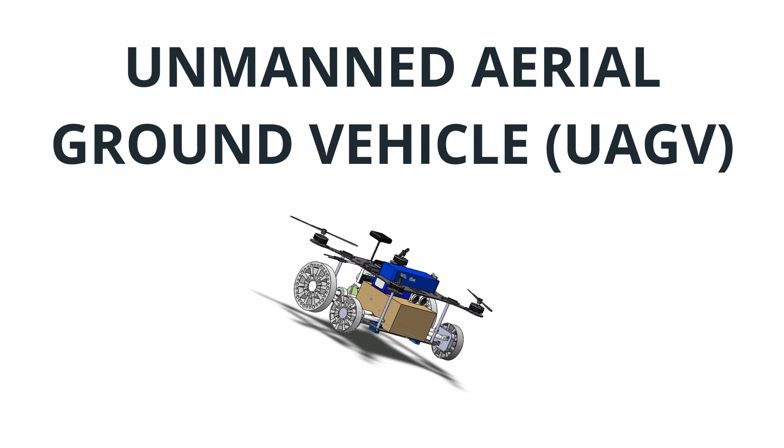Hello, this is Team 12, and today we are presenting the Unmanned Aerial Ground Vehicle, a remote-controlled flying and driving robot. The UAGV was created to aid visual mapping and search and rescue missions that happen beyond visual line of sight.

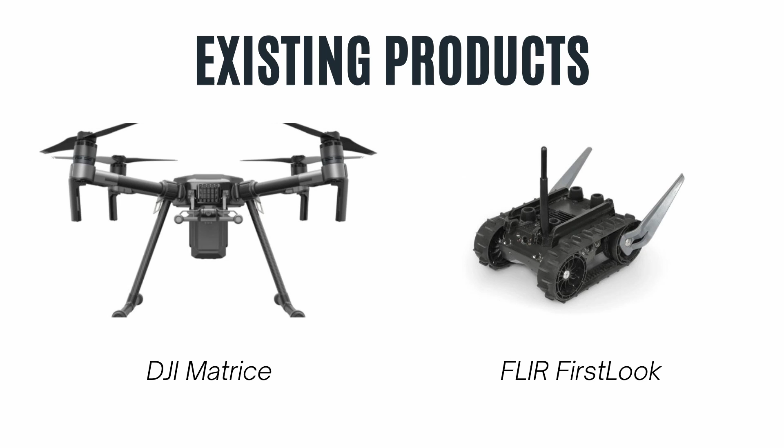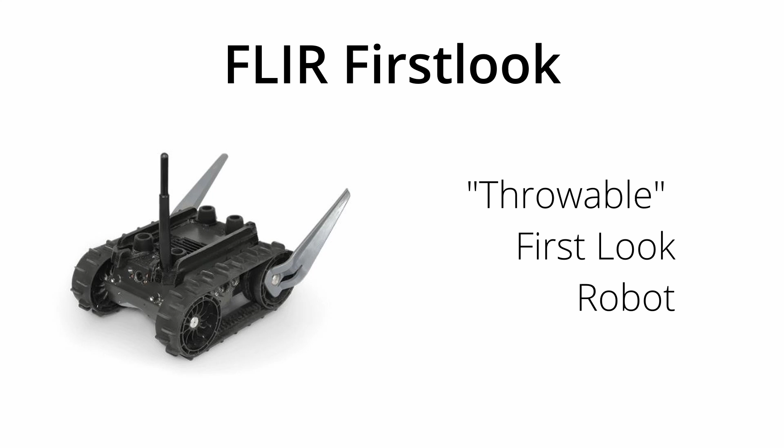Some existing products used for visual mapping and hazard detection are the DJI Matrice line of industrial application drones and the FLIR Unmanned Ground Vehicle. A popular drone from this line is the 200 series, which has a large lifting capacity and a maximum flight time of 13 minutes with a 2.4 kilogram payload. The FLIR First Look vehicle, on the other hand, is marketed as a rugged, throwable robot intended for surveying hazardous situations. While these vehicles seem promising, both lack the full maneuverability of having both flying and driving capabilities, which might be necessary for these applications.

For example, in order to scout a location, the First Look is intended to be thrown through an opening and remote controlled, but has no way of maneuvering across obstacles it encounters. The large frame of the DJI drone limits the visual surveying to a broader scope, as the flying maneuverability in and around obstacles such as buildings is very difficult.

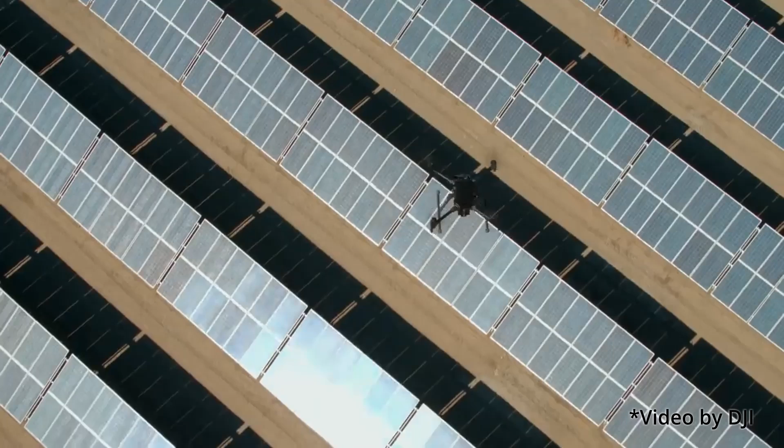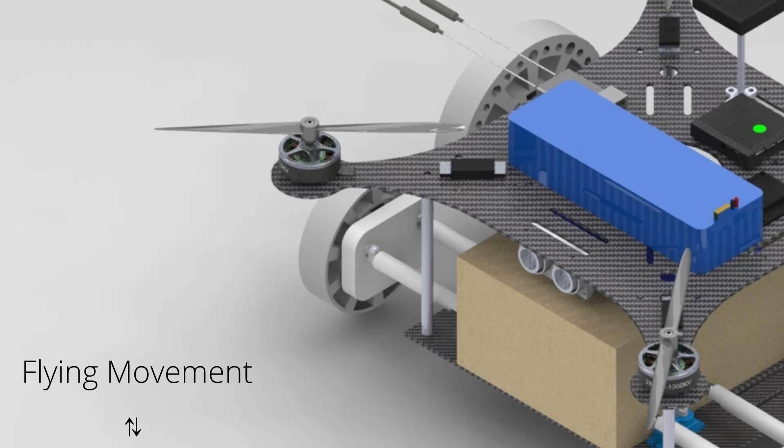The only vehicle found to fly and drive available on the market was a ground-air drone toy, with a maximum flight time of 8 to 12 minutes in flying mode and no additional payload. The goal of the UAGV was to create a highly maneuverable vehicle that can switch between ground and flying modes when one or the other is preferable due to terrain or weather conditions. The applications are not limited to this scope, with a swappable payload of up to 300 grams that can carry an emergency relief package or special thermal imaging camera, to name a few examples.

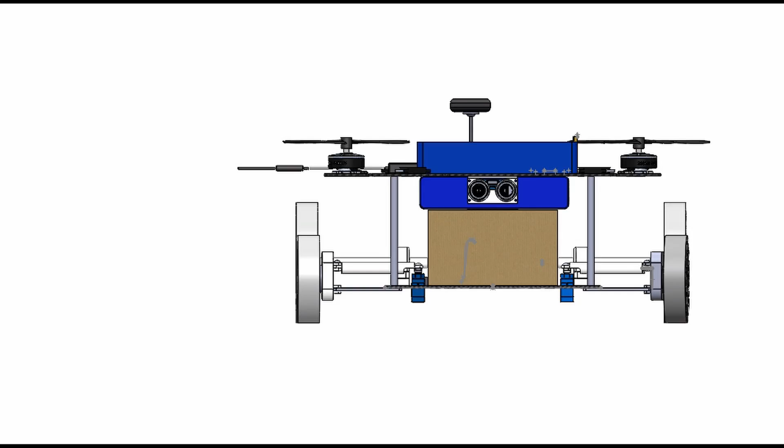Let's take a deeper look at the different functional systems that make up the UAGV. The mechanical systems consist of a steering assembly, rear-wheel drive gearbox, suspension system, payload distribution, and chassis.

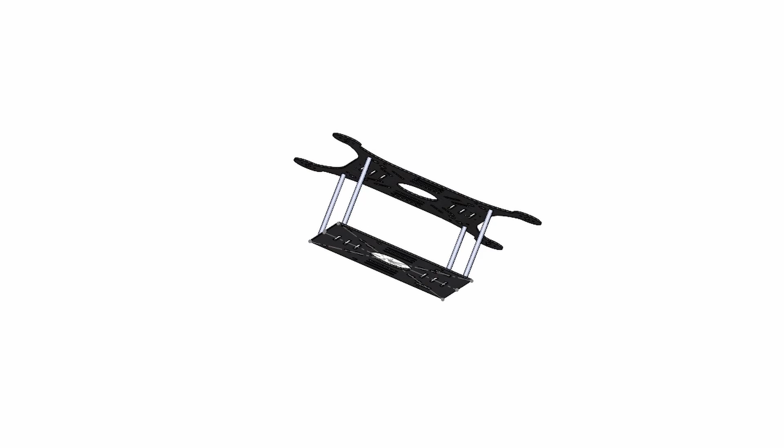Let's start by looking at the chassis design. We decided on dividing the chassis into two separate levels. The bottom level can accommodate a payload box that contains crucial supplies such as food, water, and first aid for search and rescue operations. It also houses ground systems, such as steering and drive motors. The upper level is an isolated section, meant for sensitive and critical electronic components.

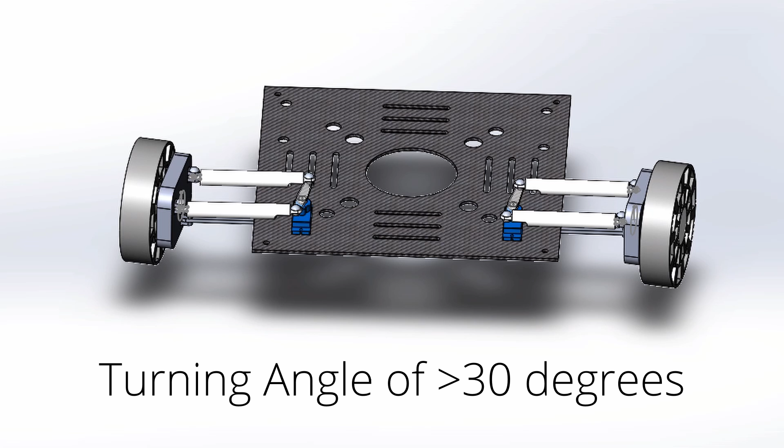Now onto the steering. The steering system is an independent two-servo tie rod design that takes up the least amount of space while also ensuring a turning angle of at least 30 degrees. The steering system consists of three supporting bars: the top two are the tie rods, responsible for turning the wheel, while the third bar is the load-supporting control arm. The rods are integrated into the wheel hub, which isolates the wheel's rotational motion from the linear contraction of the tie rods.

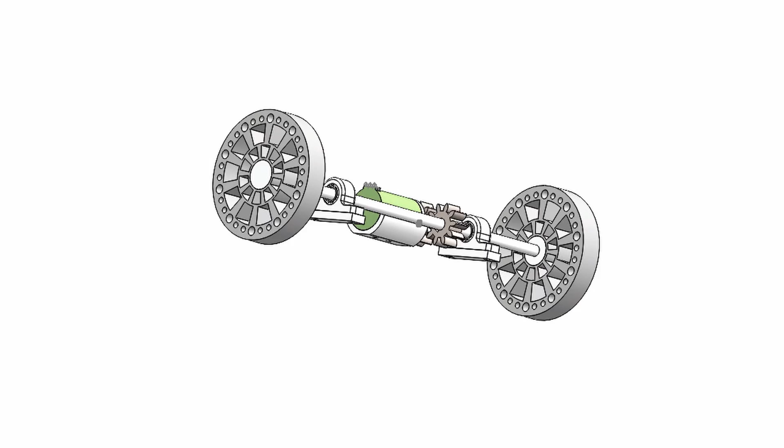Moving on to driving, the UAGV uses rear-wheel drive to propel itself while on the ground. It features a simple power transmission design that uses two gears to transmit power from the motor to the axle.

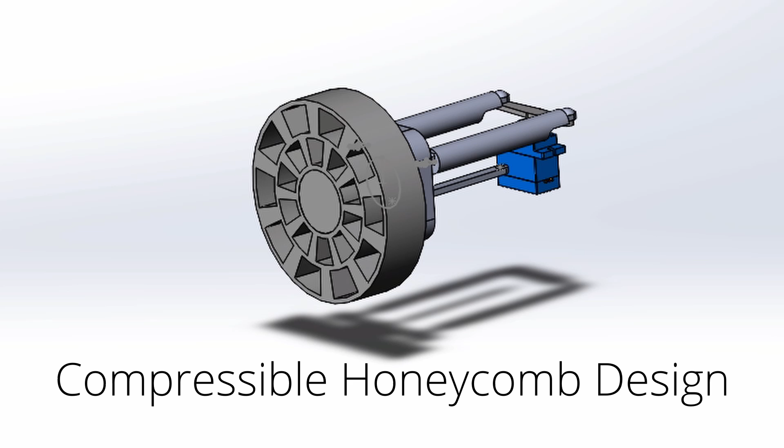The last component of the UAGV's ground travel is suspension. Instead of creating a new subassembly devoted to suspension, our UAGV has TPU 3D printed wheels, which incorporate suspension directly into them. This lightweight 3D printed wheel has a compressible honeycomb design, which allows the UAGV to traverse over rough terrain while maintaining a relatively horizontal chassis angle.

Let's now take a look at the electrical systems that allow for communication and propulsion of the vehicle. The UAGV features a live first-person view video feed, global positioning system, and onboard sensor suite that allows the operator to view the status of the vehicle in relation to its surroundings in an intuitive way.

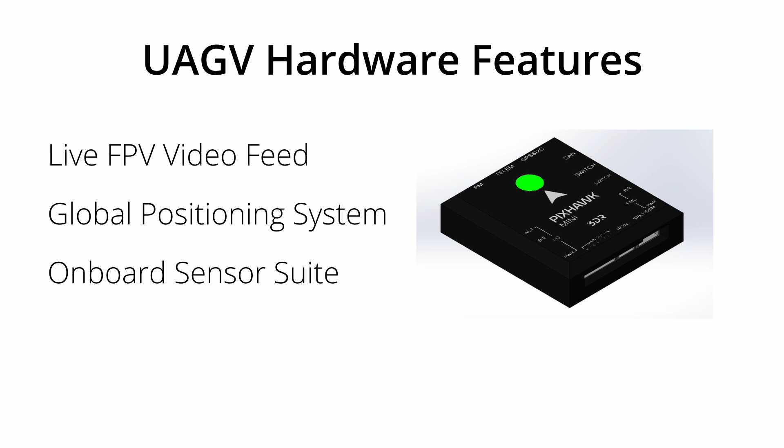The operator can then use the remote controller to maneuver in either ground or flight mode, which sends signals to the Pixhawk Mini computer on the UAGV. The Pixhawk Mini calculates values to send to all the motors connected to the computer, adjusted for inertial sensor data provided by the redundant measurement units inside the Pixhawk Mini computer.

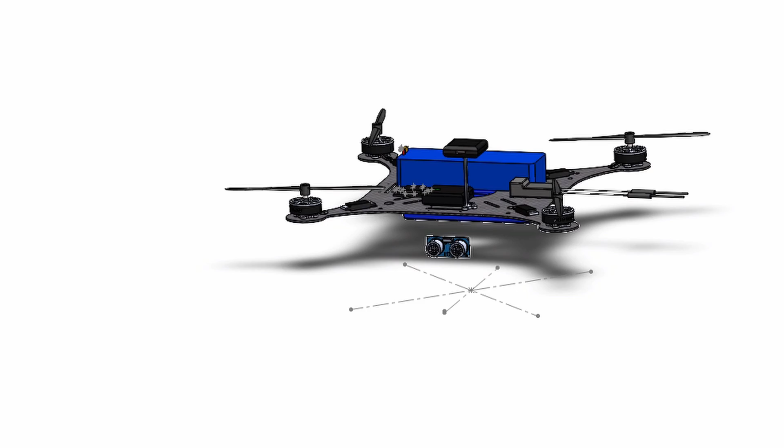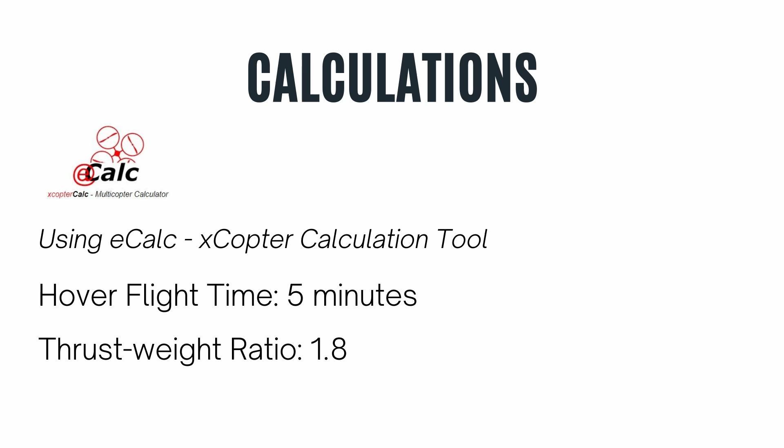In order to be useful in application, the UAGV needed to have an overall mission time of at least 20 minutes. We used eCalc to verify our flight results in standard atmospheric conditions. The UAGV's flight motor configuration allows for a hover flight time of 5 minutes and a thrust-to-weight ratio of 1.8, which provides smooth control characteristics.

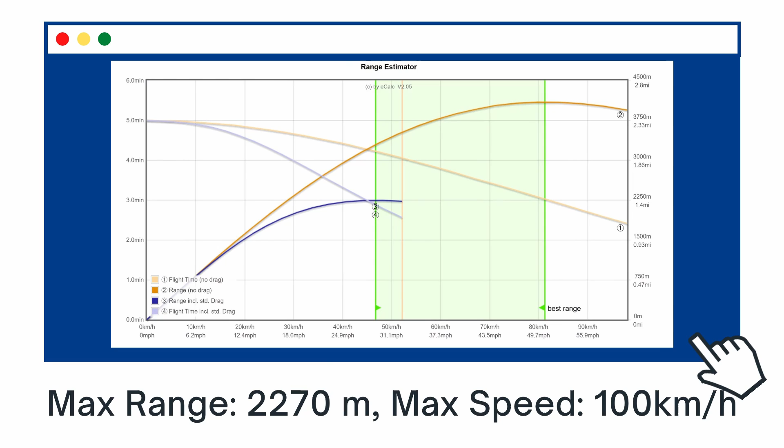When optimized for range, the UAGV can fly up to 2,270 meters and go as fast as 100 kilometers per hour. For our drive system, to ensure our vehicle is able to traverse across a wide range of harsh environmental conditions, we can demonstrate the simulated performance of our drive system using a MATLAB simulation.

The simulation calculates the total motor tractive effort required for the vehicle to propel based on our design constraints. Environmental conditions such as ground rolling resistance and incline resistance were taken into account. The simulation also considers the maximum load the motor is capable of producing before it operates above the current limit specified by the motor manufacturer.

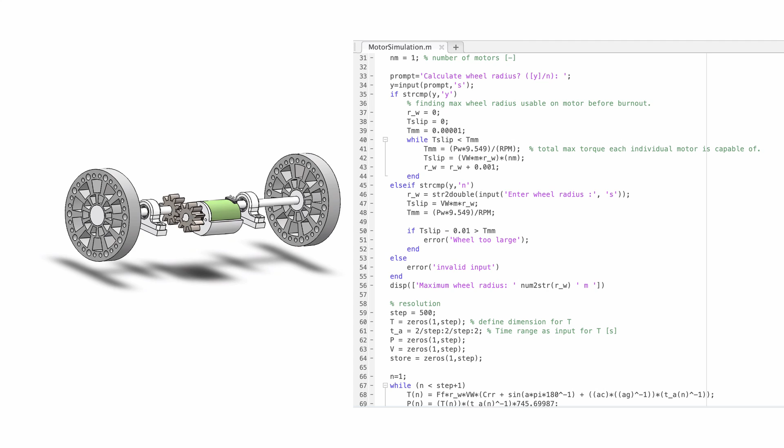Here we simulated the performance of our selected drive motor at angles of inclines ranging from 0 degrees to our maximum grade requirement of 30 degrees. For each iteration of our simulation, we considered the worst possible surface friction condition we expect our vehicle to traverse in. In all cases, the drive system was able to propel the vehicle at a rate of 1.5 meters per second squared within 2 seconds.

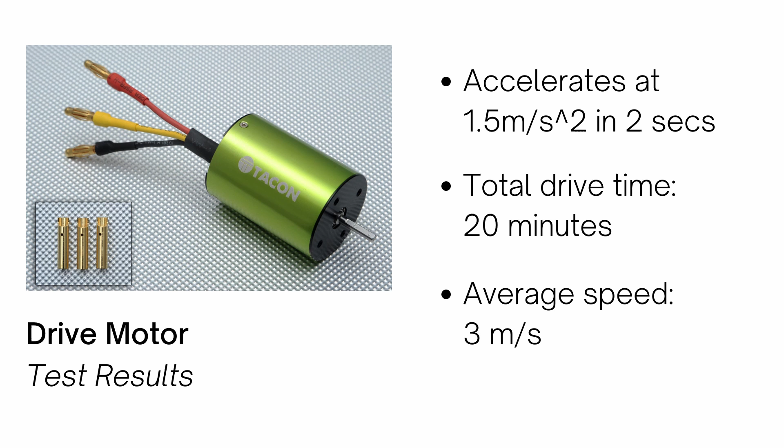With a 4S LiPo battery, our selected drive system can achieve an overall drive duration of 20 minutes at an average speed of 3 meters per second. Despite the added weight of the flight system, this performance is on par with many RC crawler vehicles available in the market. The system is also capable of driving across surfaces such as concrete, dirt, asphalt, and sand.

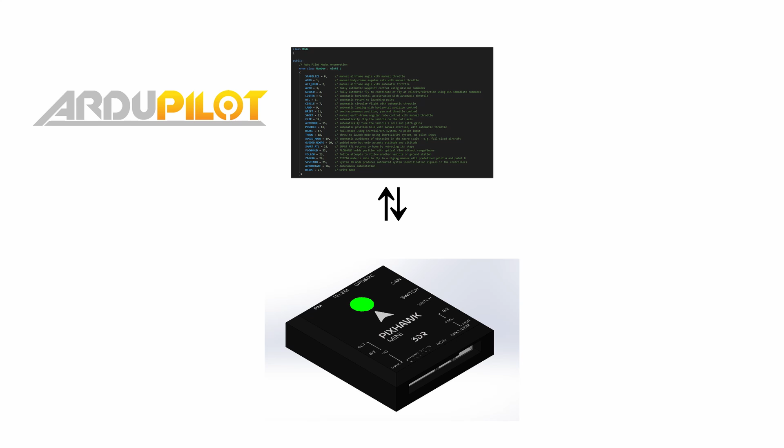The firmware running on the onboard computer is based off of ArduPilot, an open-source software for unmanned vehicles. Every vehicle comes with various manual and autonomous modes. Our objective was to put together a cohesive firmware that was able to utilize both ArduPilot's ground and aerial capabilities.

Software in the Loop, also known as SITL, is a simulator that allows one to run ArduPilot code on their computer instead of a flight controller. We will use this to demonstrate the workings of the firmware.

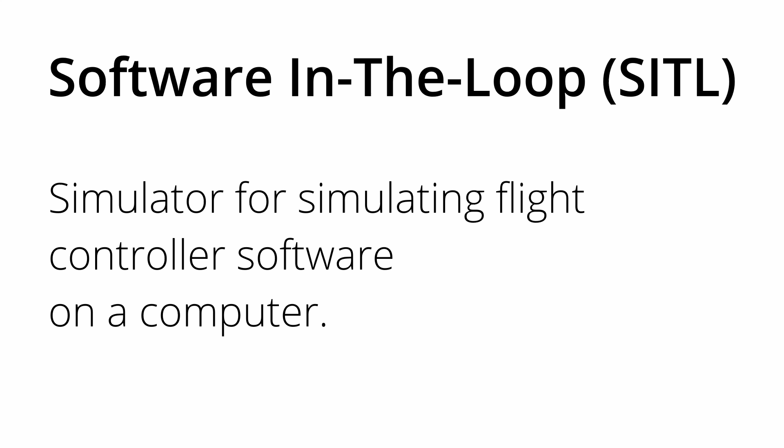We went through many different methods of combining the vehicle archetypes. Eventually, we decided to create a flight mode within Copter called Drive Mode that utilizes only the ground motors and allows the user to drive the vehicle manually as a rover.

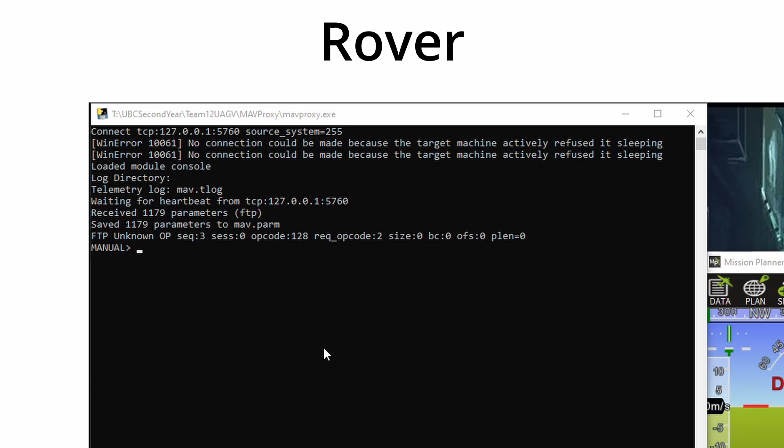Firstly, let's take a look at Rover, which Drive Mode was based off of. When we run SITL, we can demonstrate rover inputs and outputs through these MAVProxy instructions. To begin, we will simulate arming the motors. This is a safety precaution to prevent any unintended motor movement.

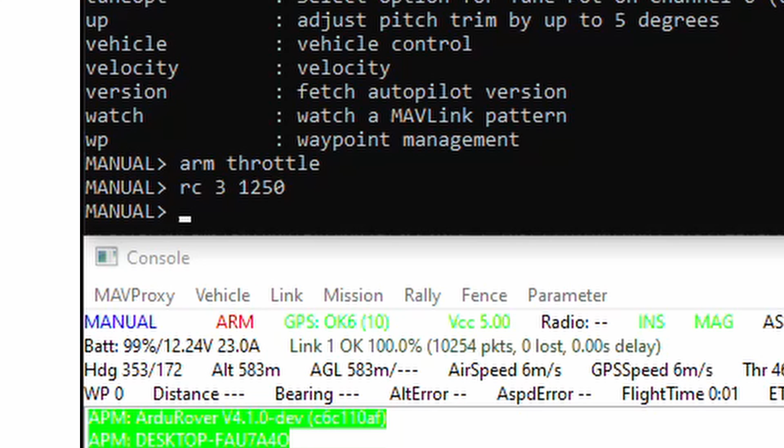Then, using an RC instruction, we can simulate remote control. Throttle is set to channel 3 by default. We can see the rover moving forward now. Typically, for an aerial vehicle, channels 1, 2, and 4 are for roll, pitch, and yaw, respectively. However, channel 1 is used for steering inputs in the rover vehicle type.

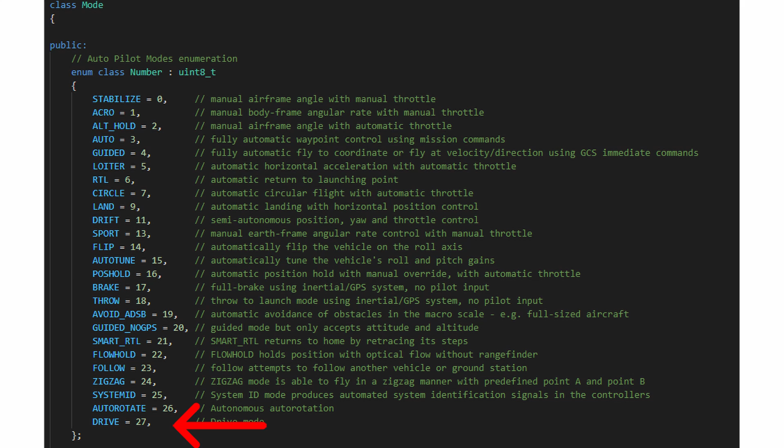In our drive mode, we are also using the roll channel to control our steering. To utilize drive mode, we need to switch over to the Copter vehicle type, which is shown here as mode 27. When we change the RC inputs, the outputs will change as well.

Our drive mode incorporates a servo steering system. High logic signals sent for 1000 microseconds, 1500 microseconds, and 2000 microseconds are associated with 0 degrees, 90 degrees, and 180 degrees respectively. Finally, we can take a look at Copter's autonomous flight modes.

Keep in mind, although we are only demonstrating the automatic flight modes, Copter does have manual flight capabilities as well. We can draw missions by giving the UAGV GPS coordinates. As well, at any given time, we can locate and manually log the UAGV's location. With a home coordinate set, we can make the UAGV return to the landing zone.

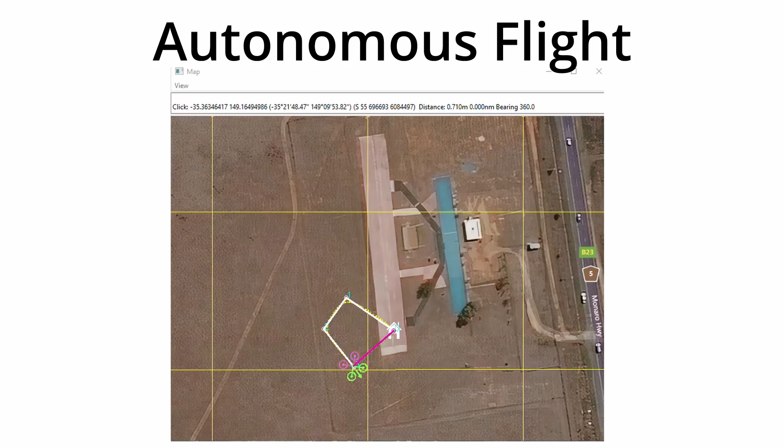After a couple of months, we completed much of what we set out to do with our UAGV despite the restrictions. It was capable of transitioning between flying as a copter and driving as a rover, and able to carry a small payload to a desired destination.

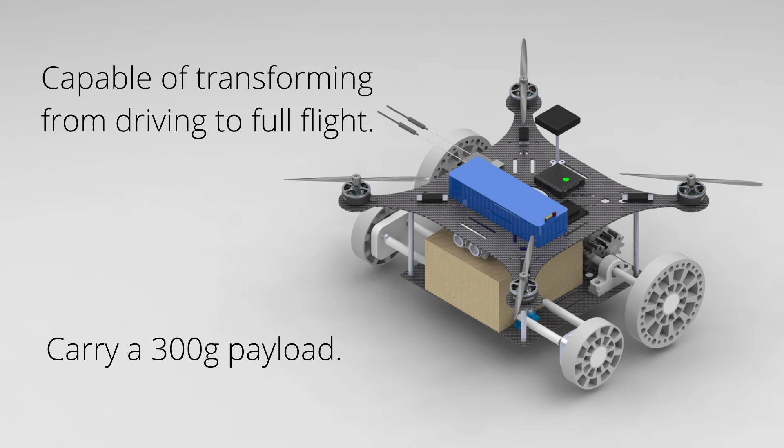But there were more features we wanted to include but did not implement as of yet. An improvement we plan to make is to have our payload delivery system be able to remotely unload our supply package while in flight. We also hope to be able to build and test a physical prototype when safe to do so, and continue further on with the project.

At the end of the day, we built the UAGV because of its meaningful applications, and we hope that it can bring help to those who need it.